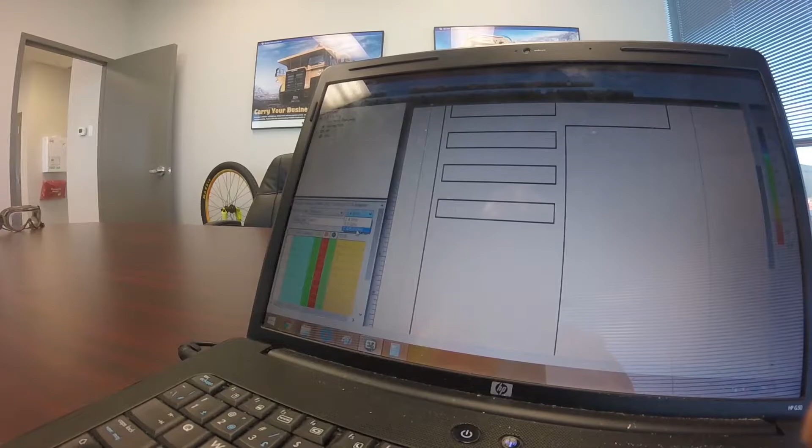And before you do your design, you want to take some preliminary measurements. The software lets you walk around and it takes measurements of whatever the existing Wi-Fi is. And this is important because sometimes you already have an existing network, or you have your neighbor's network. If you're in an office building, there's already signals coming in from other offices, and that causes noise.

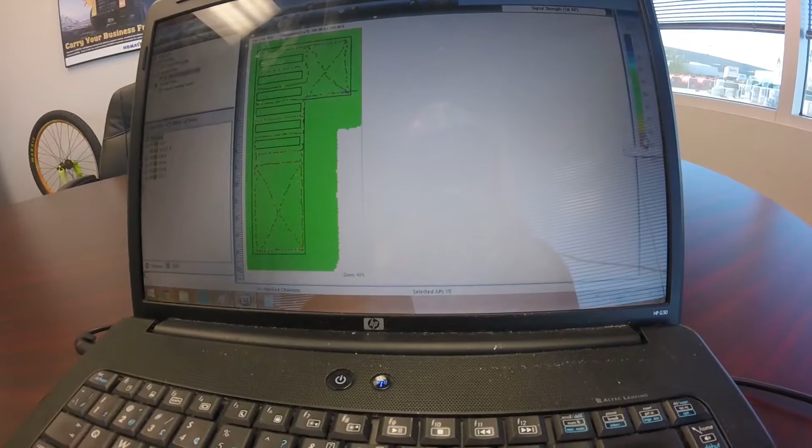So in this case, you can see it's all green, so we have a very good Wi-Fi signal in the warehouse, but it's not our signal, so we want to put our own Wi-Fi. And the way that we initially designed it is, I've got a UPS plugged into a test AP and a power injector, and this is one of the locations where I'm planning to install an AP.

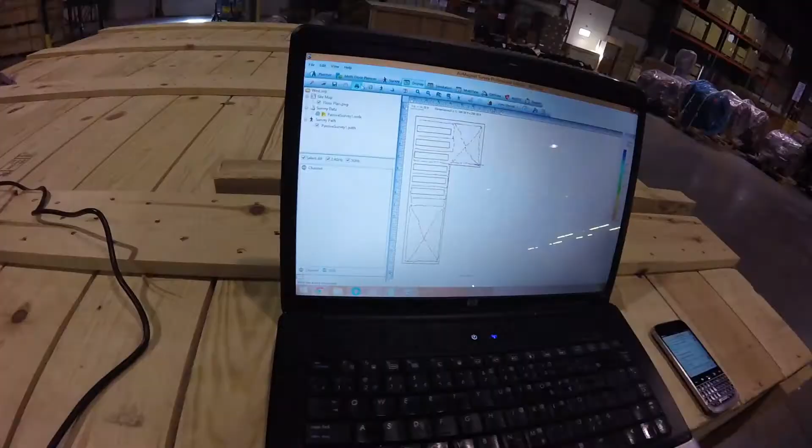So we're running the AP now in active mode, and we're going to use the Survey Pro software to take Wi-Fi measurements around the AP and in the warehouse, and that's going to give us a heat map. So we'll know what kind of Wi-Fi coverage we're going to get if we place this AP here. And that'll let us prove that this is a good spot for an AP and figure out its range.

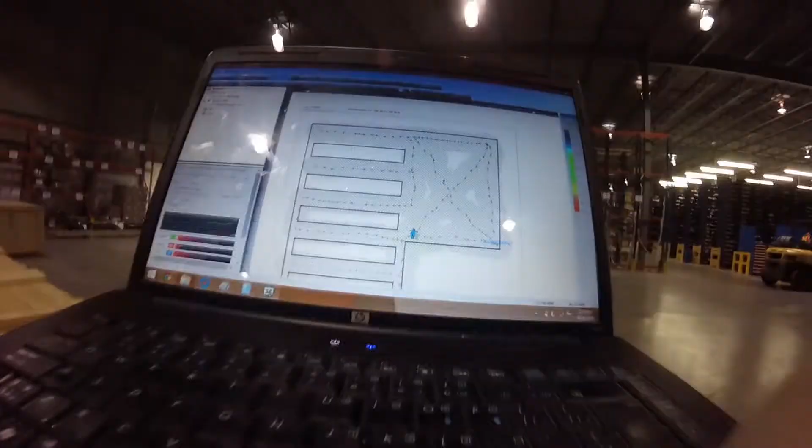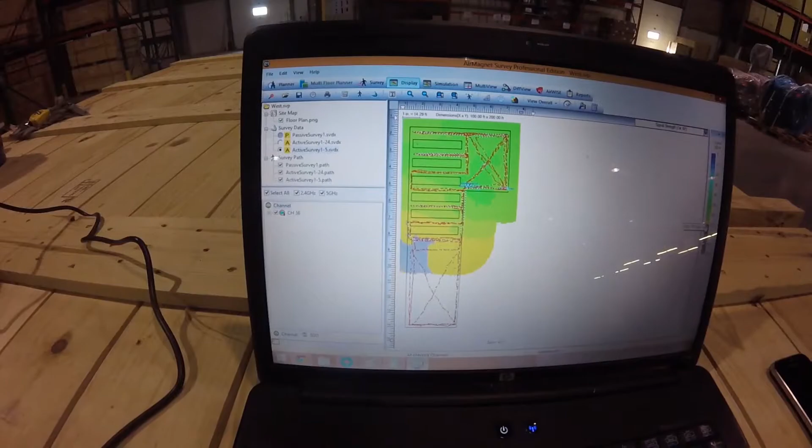So we're walking around and we're taking measurements, and you can see in the green area we've got very good signal, and in the yellow area it's a little bit of a poor signal, so we're going to have to put another AP in the middle or at the bottom somewhere. Obviously I didn't bother walking all the way to the bottom of the warehouse because we know we're not going to get an acceptable level of coverage.

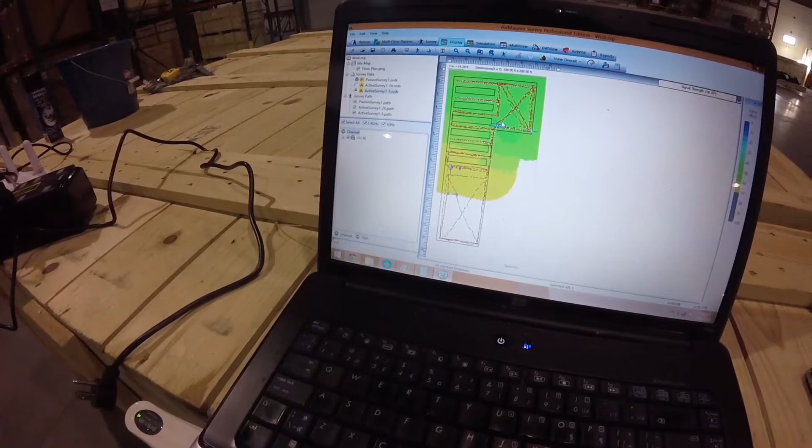And we're looking for the signal strength and also the signal-to-noise ratio. And we're going to talk more about these parameters in another video once I get around to making it. But just for now, we're going to save this survey, and we're going to move the AP to another part of the warehouse now.

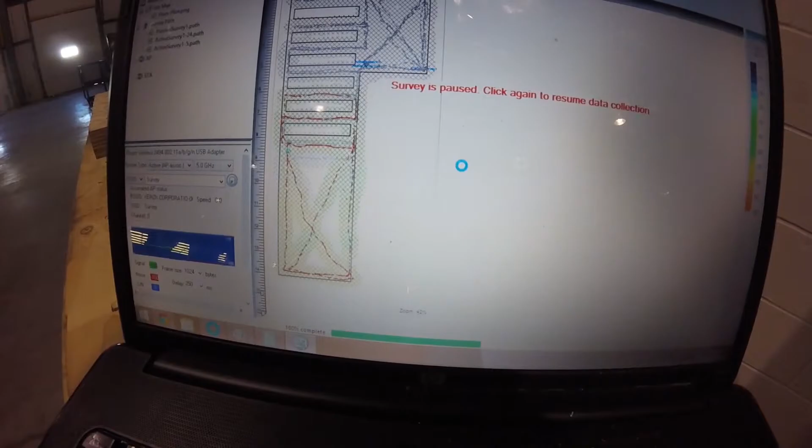And as you can see, we've got another signal map, and it looks pretty good now, so we know we can cover this warehouse with 2 APs and get a good signal in the areas that we've selected.